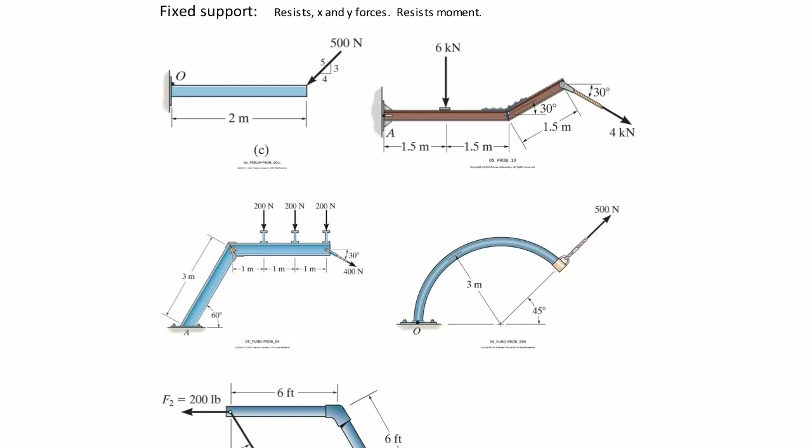This one here we've already solved a little bit, but this is a fixed support as well. If this was a pin, it would - well, which way would it rotate? By the line of action, the force would be going in this direction, and the lever arm would be this way. So it would rotate in this direction if that were a pin. But because it's not a pin, there's something else going on here other than X and Y force. Same thing here.

So anyway, what I want you to do is look carefully at what makes sense as far as fixed supports, and then let's talk about how to draw the free body diagram and how to write the equations of equilibrium.

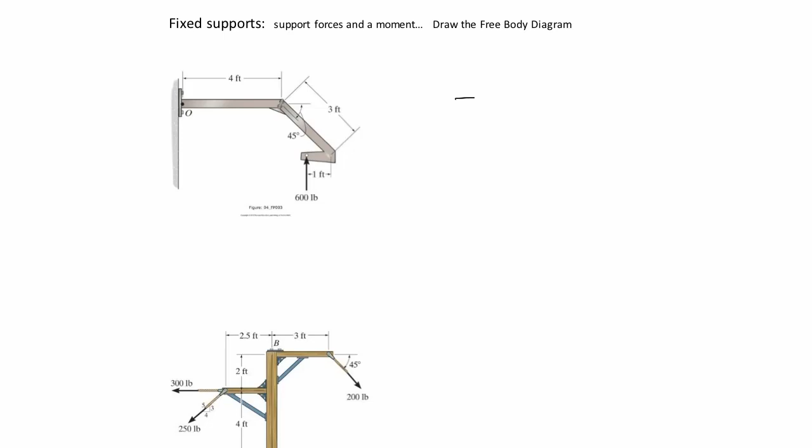So first, let's draw the free body diagram of this. It's got an angle - guess we can draw it like that. There's a force going this way, and it would tend to rotate. If this didn't, it would tend to rotate like that, unless this was a pin. But it's not a pin, therefore it doesn't rotate. And what does happen? It's got an X and Y reaction, AY and AX, and then it has the ability to resist moment. So there's going to be a moment about A, which is trying to keep it from rotating.

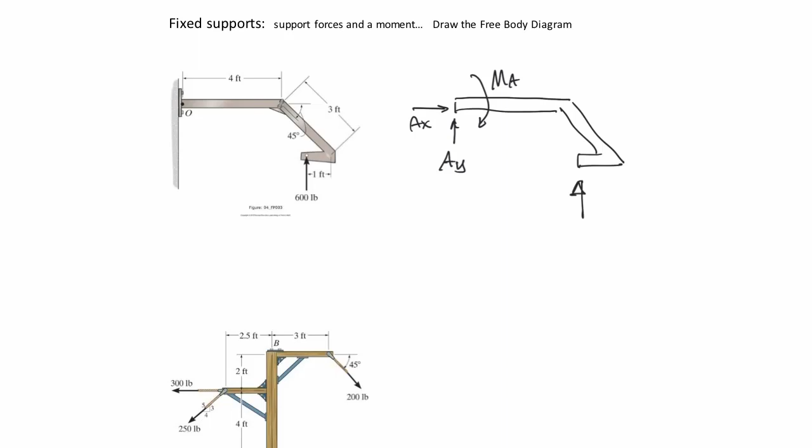All right, how about this one? In a similar kind of way, we've got a free body diagram. Got something going on out here. It's going to have some forces, it's going to have some lever arms. It will have something to keep it from moving this way. I don't know which direction AX is going to be, so I'll put AX like that. But my guess is it would tend to rotate this way. Therefore, the reaction has to be in this direction. So I'll say moment about A as a reaction goes like that.

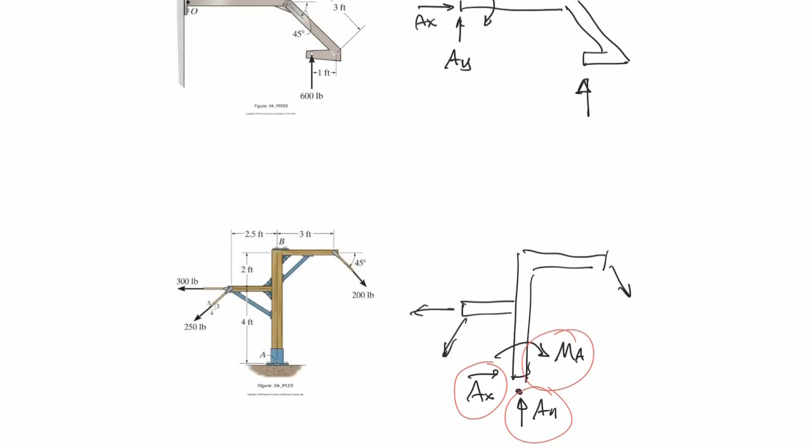So what I'm doing here is these are the reaction components. Let's go back up to here - these are the reaction components that you need to resolve. And we'll talk about how to resolve those in the next page.

Okay, so here is a fairly straightforward beam. It's up at an angle. And what we want to do is find the reaction at O. It's probably easy by now that we've talked about it, that this would be a fixed support. It's not a pin - it's going to tend to rotate in this direction. Therefore, the reaction has to be in this direction, that keeps it from rotating. So let's go ahead and draw the free body diagram, and then we can solve for things.

This is built up a little bit with that little thing there. So what I'm going to do is draw the components of the force. It's going to have components going in this direction and in this direction.

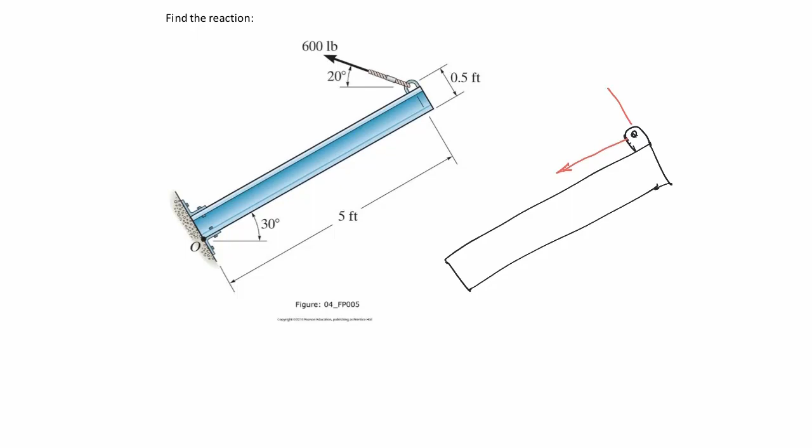Because this angle here is 20, and this is also 30, I'm going to call this 600 cos 50, and then this will be 600 sine of 50. Here's my point of concern.

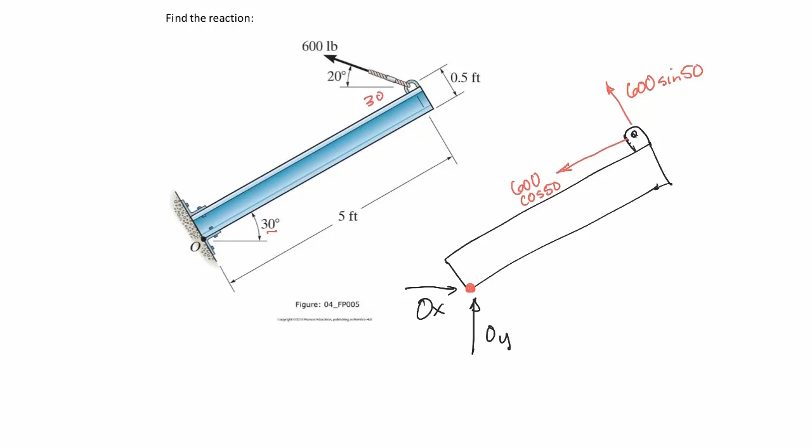So let's draw our reaction. I'll say that there's an OY and an OX. Because this is a cantilever, a fixed support, I know there is a moment about O that looks like that. Let's see if we can find out the moment about O.

Sum of the moments about O is equal to 0, counterclockwise positive. What have I got? Well, I have this component, this cosine 50, times this lever arm. If I look right here, it looks like it is 0.5. And this sine component has this lever arm of 5. So let's go ahead and put those in there.

That'd be 600 cos 50 times 0.5, plus 600 sine 50 times 5. And now I can find the reaction moment.

I beg your pardon, I left something out here. That is going in the positive direction, and then the reaction is going in the negative direction. This is what this reaction is all about. In order for this to equal 0, I have to put that reaction in there. So that would be minus the moment about O is equal to 0. So that reaction, just like a force reaction, has to be in the moment equation.

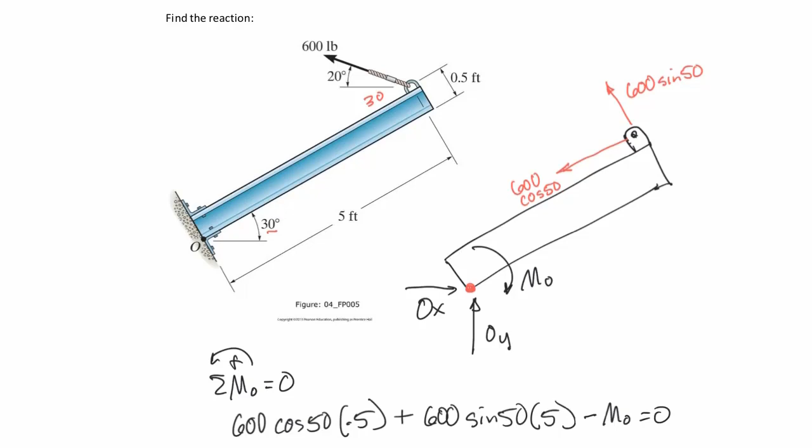Now I can sum that up and find out what the moment about O is. And I got the moment about O reaction is equal to 2491 pound-feet.

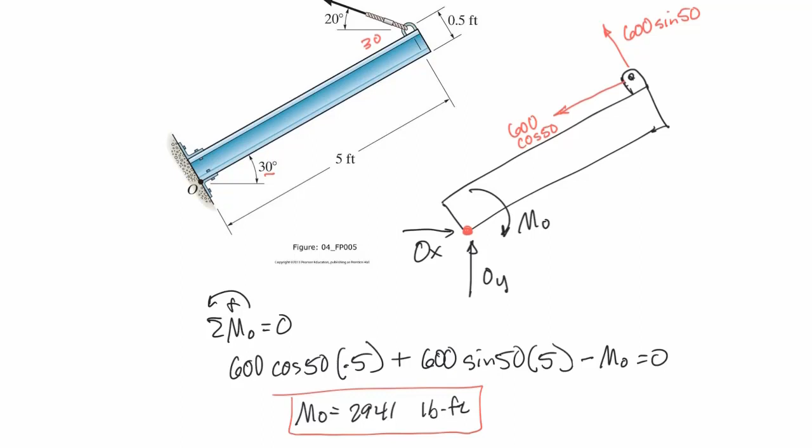Okay, how about the forces in the X and the Y? Well, those are slightly different. However, let's go back up to the original picture and see what we can see. What I have here is two components in X and Y: 600 cosine 20 going that way, and 600 sine 20 going that way.

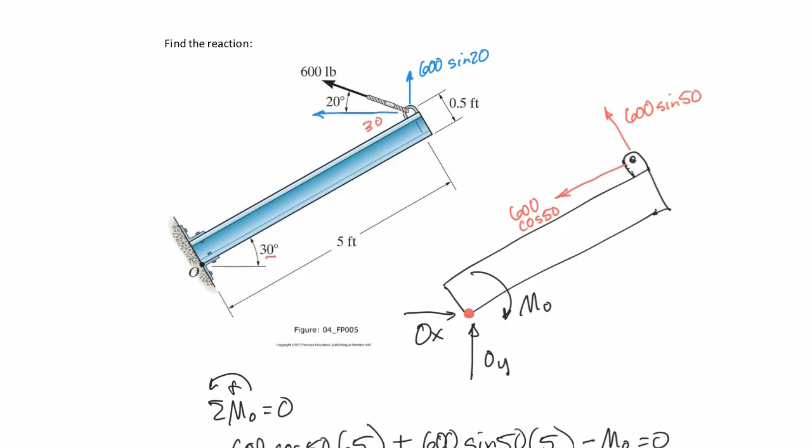Alright, so let's sum the forces in the X and the Y then. Let me go back down here, and let me zoom out here, that way we can see it all.

So sum of the forces in the X is equal to 0. So I have OX in the positive direction minus 600 cos 20 equals 0, and so OX is equal to 564.

And then sum of the forces in the Y is equal to 0. So I have OY positive plus 600 sine 20 equals 0. So OY is equal to negative 205.

And that is it, both in pounds. Note the directions of the arrows and the directions of the answers, or the sign, S-I-G-N, of the answers, and that'll keep us on track.

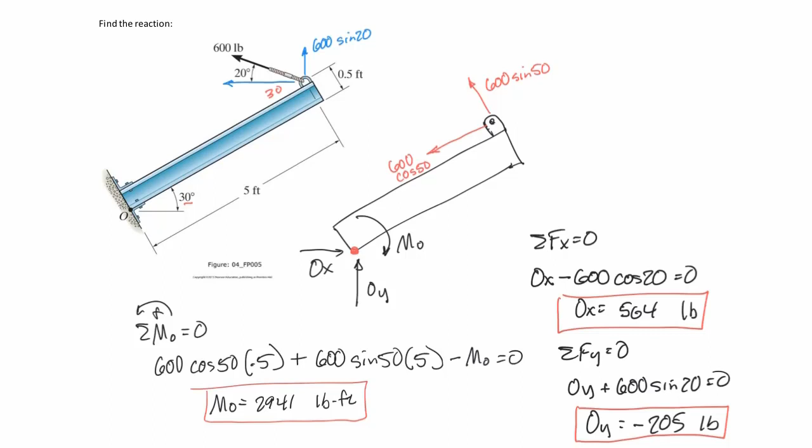Okay, so here's one I would like you guys to do. It's not very hard, but just to give you some practice. Draw the free body diagram and find the reaction. I'll give you a minute or two to do that.

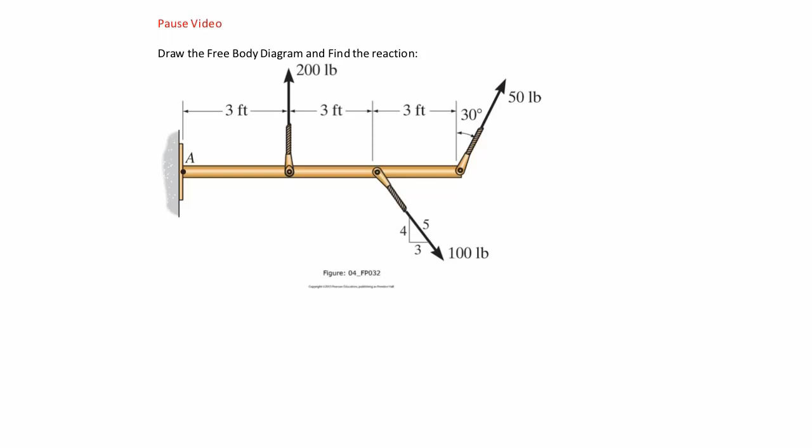Okay, so here's the solution. Again, recognizing that this is a fixed support, I have a force going up, 2 components of that force and 2 components of this force. So I've drawn those on the free body diagram.

The reaction over here is especially important. I have an AX and AY, and I'm guessing that the moment reaction is going in this direction. I think that's probably true, but we'll see as we solve it.

So sum of the moments about A, let's see what A is. I got 200 times 3 going that way, 80 times 6 going that way, 50 cosine 30 going this way, they all have different lever arms.

And then I add the moment reaction going there, and I get the moment of reaction about A is negative 509. So I did draw my arrow incorrectly, so the reaction is actually going the other way, but that's okay. I drew it as a positive, I solved for it as a negative, and that's the correct answer the way we do it.

Sum of the forces in the X direction, I got minus AX, I got these two going in that direction, so we got AX is positive 85.

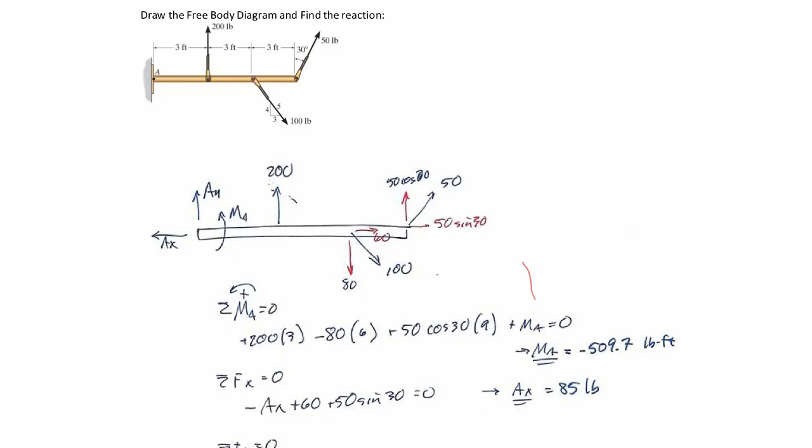And then sum of the forces in the Y, again I got AY is positive, that's negative, that's positive, and I got AY is equal to negative 163.

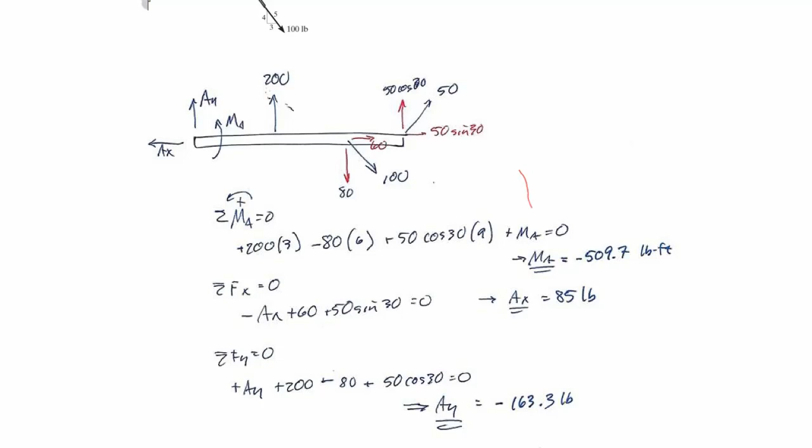So what you'll find is sometimes it's easy to get the forces and the moments in the correct orientation to start with, and sometimes it's not, but it's perfectly reasonable and appropriate to leave them as negatives as you solve your problem.